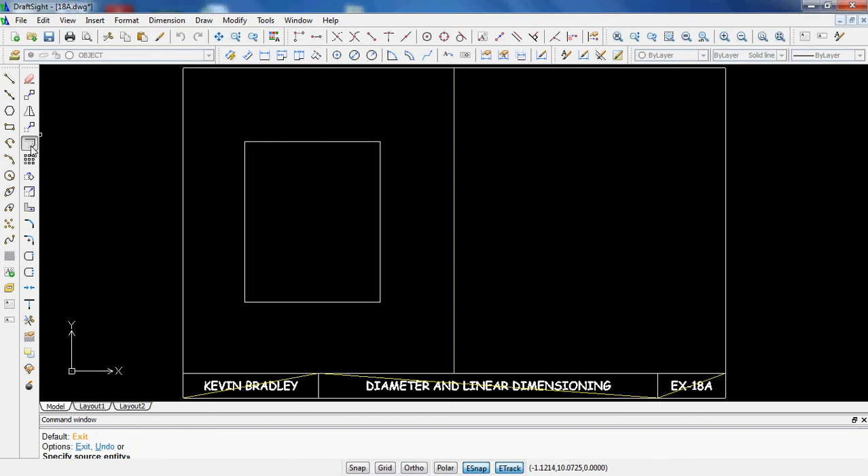So offset 1.75. I'm going to offset this line over this way. Hit enter to get back into offset, and it looks like I'm going to come down 1.25. Enter. And that will help me to create the center of that guy.

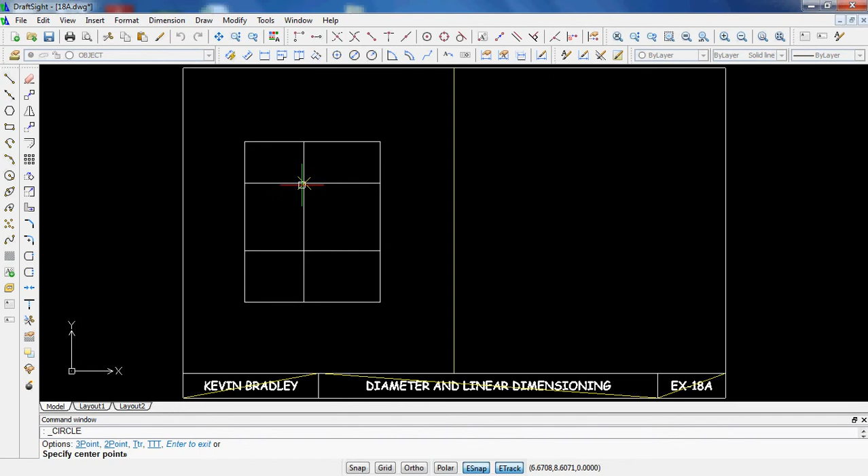Then it looks like I need to offset down again 2.053 according to the book. You should be able to find this lesson on the shared folder under lessons. It will be there. These have a diameter of 1.5, so make sure you put in the correct diameter and not accidentally put in the radius.

And then, of course, I'm just going to copy this from here so I don't have to redo it. So there's pretty much my drawing right there. I'm going to let you guys dimension it.

But I am going to do one more thing. I'm going to go to center line, and click on my center mark button. Click here, hit enter, and click here. Now I've got my center marks, and I should be able to dimension that very easily.

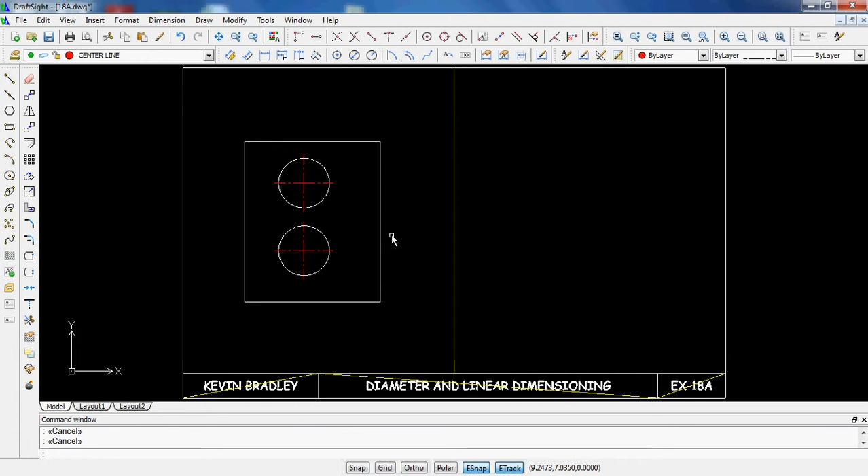Okay, I'm going to go ahead and draw this circle, or the one to the right. So I'll start out with a circle, and the dimension of this circle looks like it is 5 inches. So D enter, 5 enter. And of course I should be drawing on the correct layer.

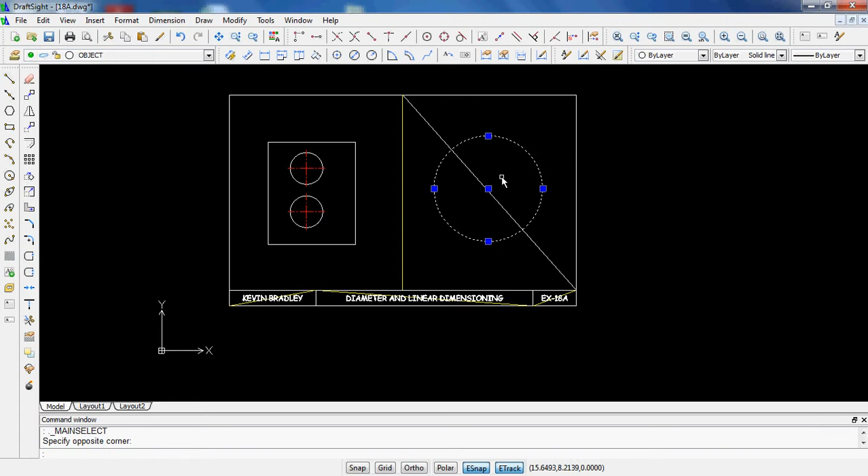What I might do is draw a line from here to here, highlight this circle, and move this circle, snapping that to that line right there.

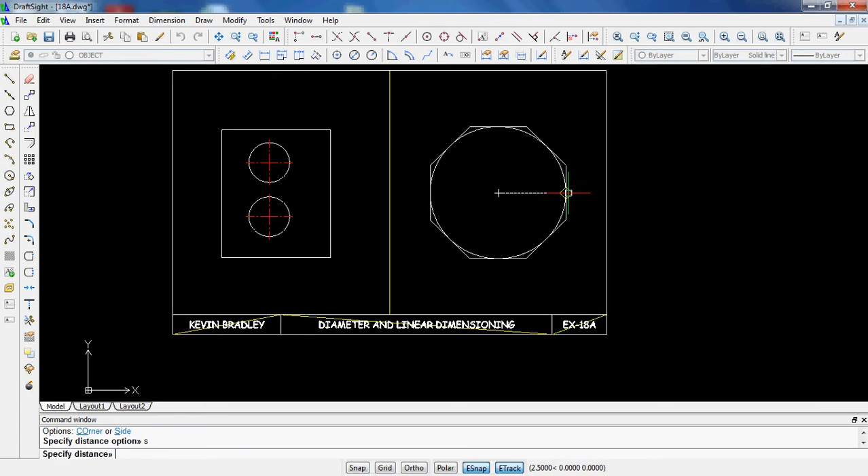That will allow me to go ahead and draw my polygon. Looks like my polygon is 8 sides, so 8 enter. It looks like I know the center of my polygon, and this is going to be a side polygon because it snaps out here to the side. So it's going to look like that.

And it looks like I need some center line, so I'm going to go to my center line layer, click here, and click on those. So that's taken care of. Go back to my object layer to be able to start drawing some circles.

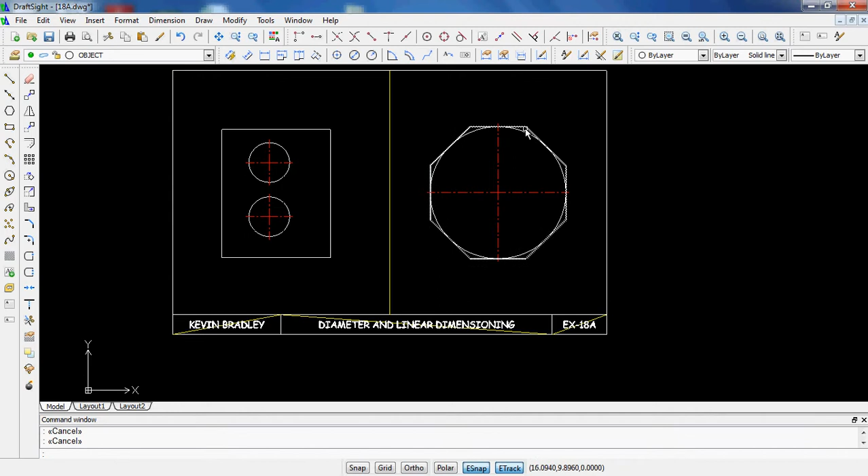One thing I need to do, it looks like, is use the offset tool. Actually, I'm just going to draw some more center lines because it might make my life easier. So I'll go ahead and draw a couple circles, and these are 1 inch in diameter. So D enter, 1 enter.

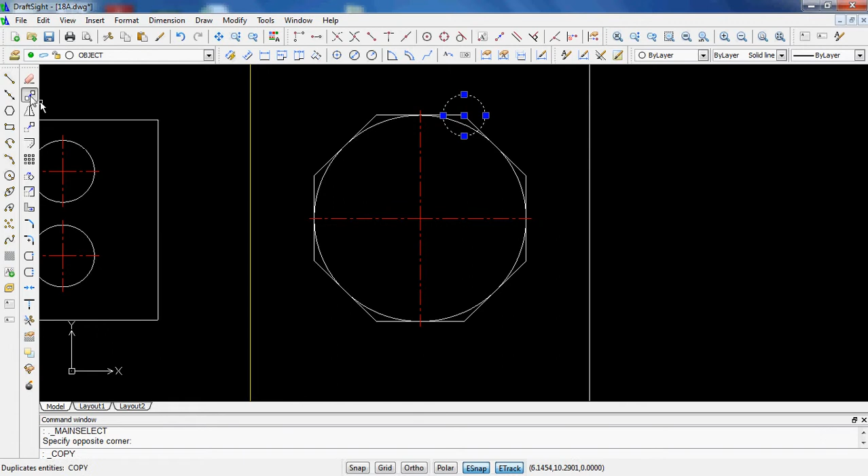And I can copy this a bunch of times, which will save me a lot of time. These go to every point, looks like, around the edge. That makes life easier. Now I can turn on my centerline layer, click on center mark, and just keep hitting enter and click on every single one of these. This should make my life a lot easier than drawing them manually like we used to do.

Okay, so there they have all their center lines, and those are good to go. Now we just need to make sure that we offset some lines so we can draw the inside circle.

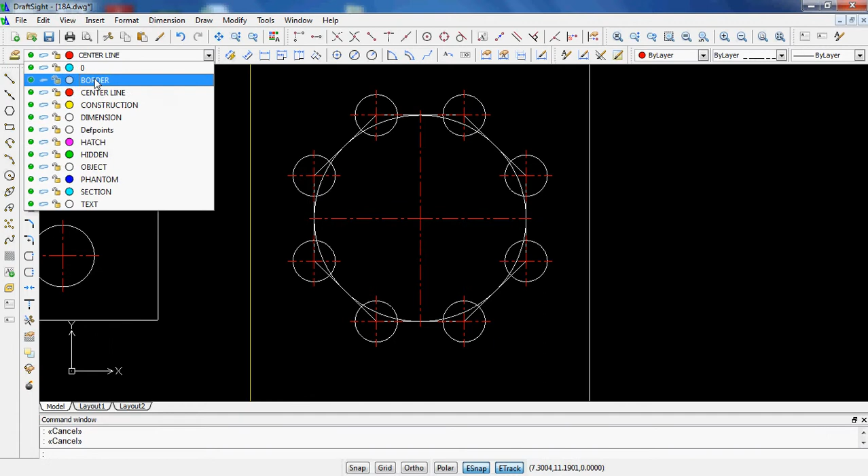So I'm going to use offset. Looks like we have some pretty interesting numbers. 1.464, it goes down from this direction. So there we go that way. And it looks like it then goes down 2.071 from there.

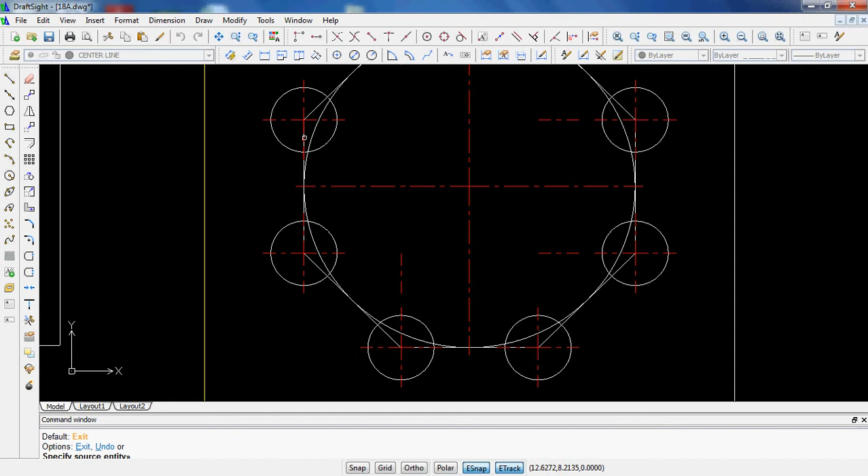And then they look like they go over 1.464 from this direction over here. Oops, that would not be right.

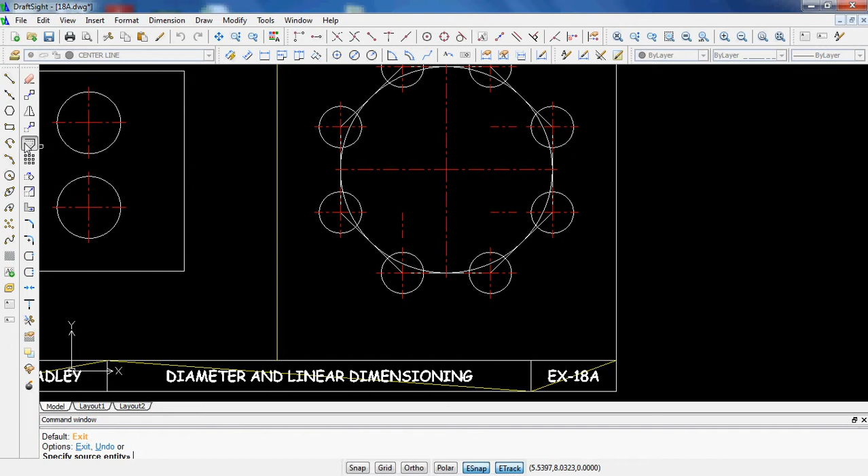Okay, so this should help give me at least a center mark. I'm going to hit my offset button. This should help me at least give a point where each of these things belong. Okay, so what I need to do now is do a little bit of copy.

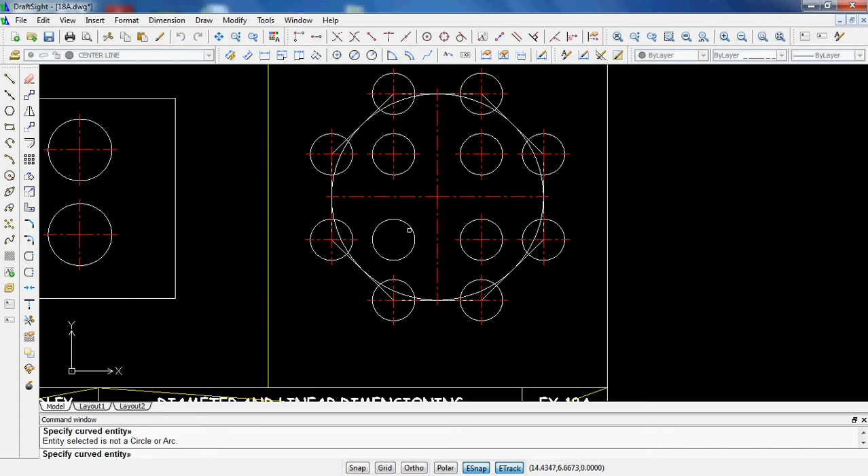Okay, so those would look something like that. I'm going to get rid of these so I don't have any double lines here. Then I'll come back and use the center mark button to put in proper center marks to each of those.

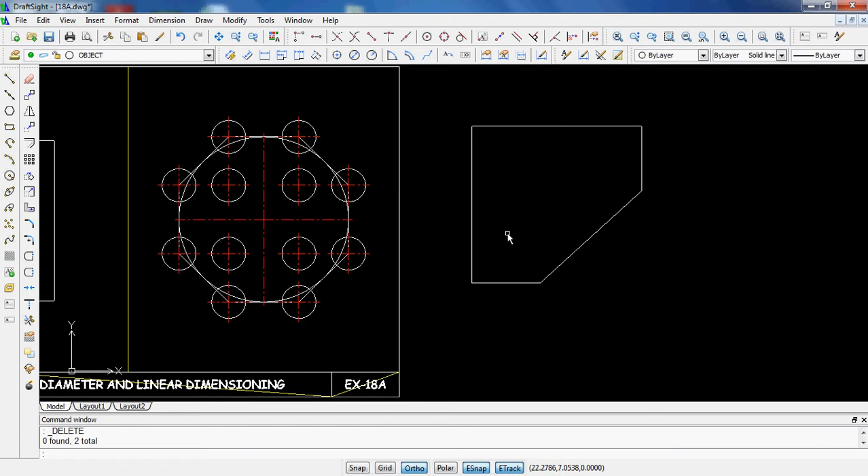So the next one might be, this guy goes, it looks like it goes up 2 inches. I might draw this line up 2 inches from this side. Then it's going to go in a certain distance, it looks like it goes in 1 inch. And then it looks like it needs to come down.

I'm going to turn ortho off. I need to come down 30 degrees from right there. But remember, if I'm starting over here, it's 180 plus another 30, so I need to do 210. So I'm just going to draw a line that's, say, 3 inches, so at 3, and then angle of 210 degrees. Enter. And then, of course, I can trim this guy off, and I can trim this guy off, and it would look something like that.

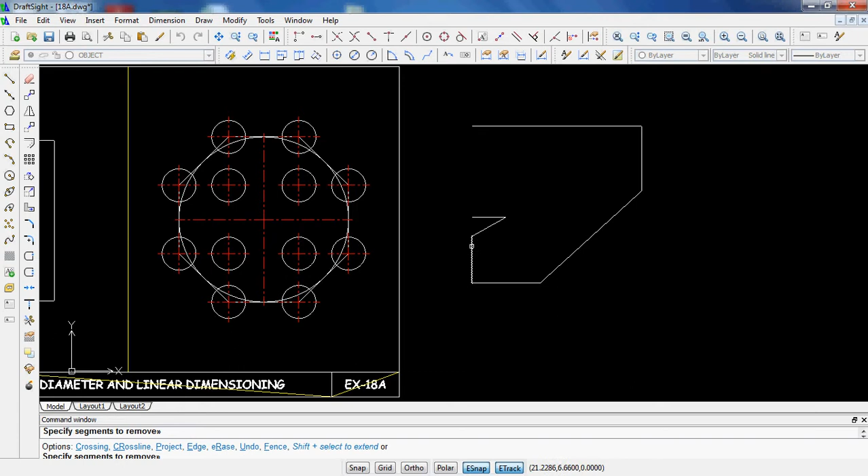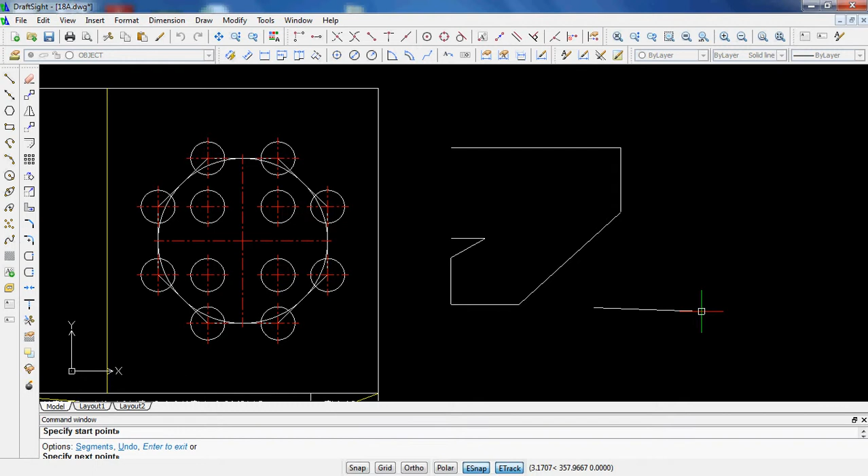So I think you can finish the rest. For lesson 18, you guys are responsible for 18A as well as 18C. And if you struggle with 18C, there is one called 18C Helper, and it will allow you or help you to draw lesson 18C. Okay, we'll see you in the next tutorial.